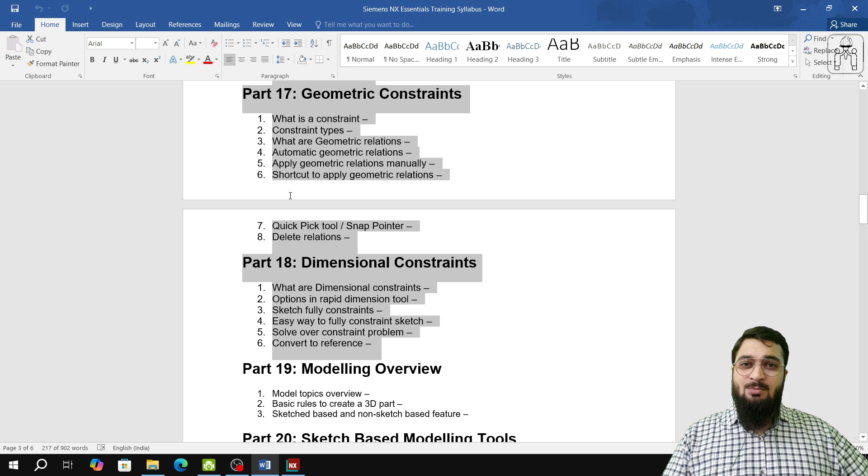In part 17 and part 18, we discussed the types of constraints and how we apply them, what are the various methods in which constraints can be used, and how dimensional constraints sometimes overthrow geometric constraints, and how geometric constraints allow us to get to the dimensional part easily but are not always fixed or superlative.

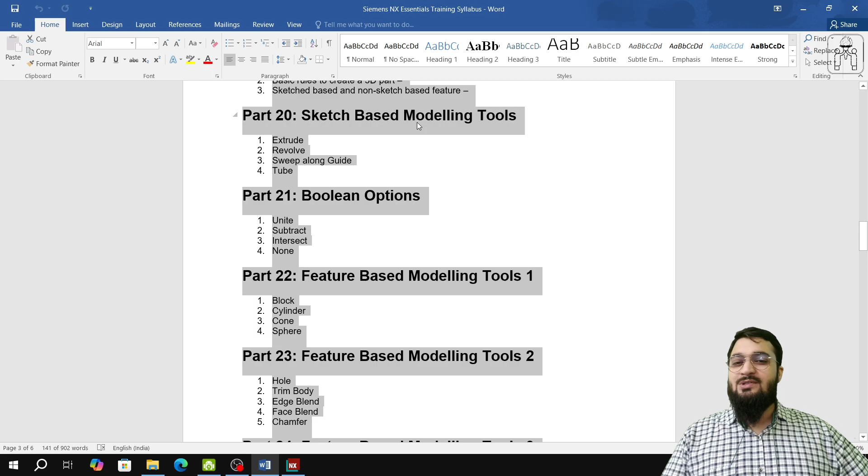Then we came to the modeling part, that is overview, and then we learned about sketch based modeling. So from part 19 till part 26, that is what we are studying today, is the part of modeling. It includes sketch based modeling tools, Boolean options, and part 22, the feature based modeling tools — the simpler ones grouped in part 1 or part 22 of 38, then somewhat difficult are part 2, then more difficult part 3, then finally patterns are part 4.

Now coming to the last part of modeling, that is part 26 of 38, the part navigator. So now we'll start with the part navigator without any delay.

The first thing available is the part navigator itself, the model history, and feature reorder. Part navigator is the option available in the left border bar, the resource bar. As we studied in the border bars section, the left border bar and resource bar are somewhat the same, along with the top, bottom, and right border bars.

In the resource bar, you have certain icons, and when you hover over them, you will see the label for each. Part Navigator is the resource we use through the modeling part, and also in the assembly part, but till the modeling part it is the core thing we use. This includes the history, model views, cameras, and model history.

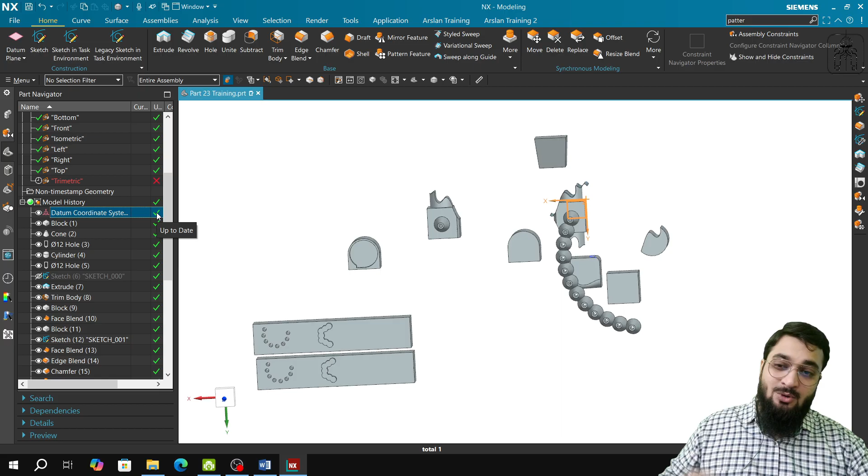Next, we come to the model history. Model history is the section in the resource bar or part navigator that allows you to see all the feature operations that have occurred in that particular file or window. So first was the block, then the cone, hole, and so on. It enlists all of them in chronological fashion, and we also learned how to reorder them and how to hide them.

You can just hide a feature from here, or unhide it from here. If you hide the parent feature, and that feature is parent to or related to another thing, it will hide all of it. So in order to unhide that, you will have to select the latest one, and when you select the latest one, that thing becomes available again.

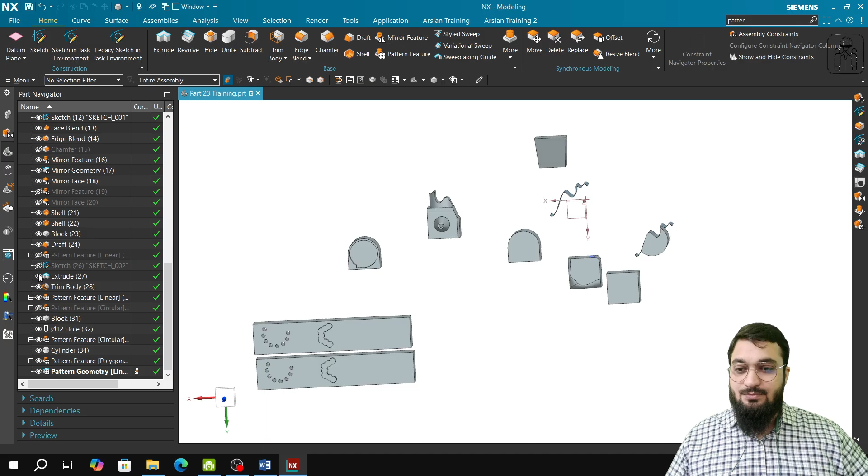When I selected this particular mirror face, it allowed me to unhide or show all of its previous parent features. This mirror feature is possible only because of this particular mirror operation. This thing is possible only because of the extrude, which is possible because of the sketch. This cylinder shape is possible because of the trim body, which is possible because of the cylinder operation, which is possible because of the block operation, and so on.

So all of this will be visible or unhidden when you click on the latest feature. But if I hide that last feature, it will also hide all of the previous related features. So that is also one thing.

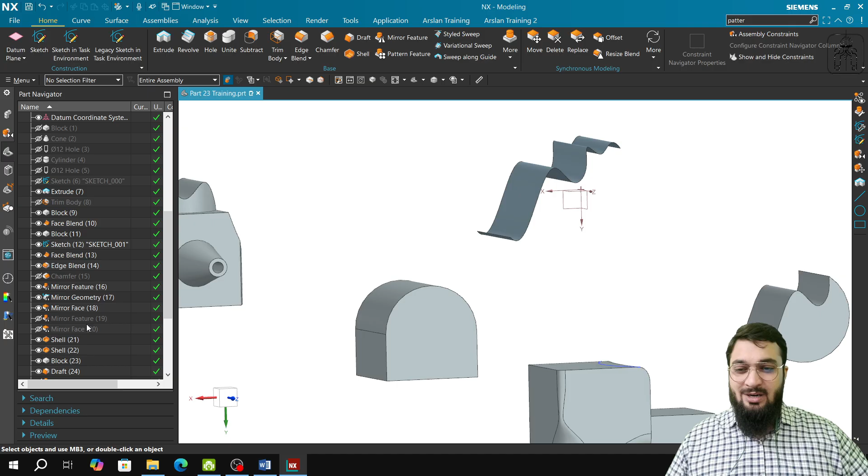If you only want to hide one thing, or hide only the parents, you can just click on hide parents and it will hide the parents. Since this other thing is not a parent, it will not be hidden. So this is also a feature that is available.

If you want to delete that, you can just click on this cross button, or you can click on that particular thing and press the delete button on your keyboard, and it will delete everything. After that, you can also right click and click on delete. So there are three methods of deleting.

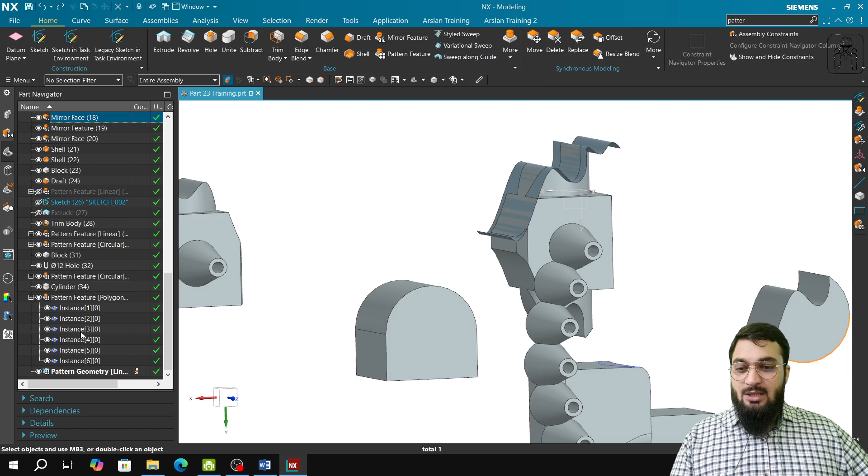Next, you can suppress a particular thing. For example, I have this pattern feature, and these are the various instances available. I will show you all of the instances, and this particular instance, for example, I do not want.

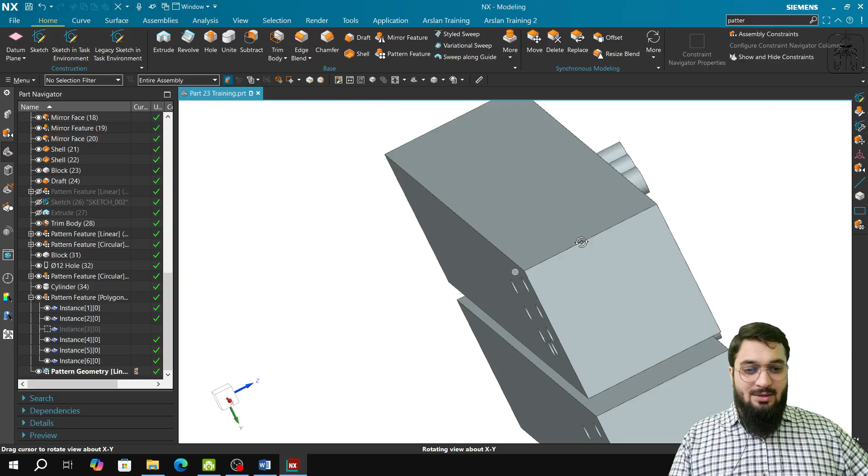So I'll just click over here and I will click on suppress, and you will see that that particular feature has been suppressed in its original, as well as the thing which was used to pattern that. Okay. However, if I unsuppress that and I just click over here, I will not be able to select that particular thing over here, because this thing was patterned using the pattern geometry. So this is something which you need to understand.

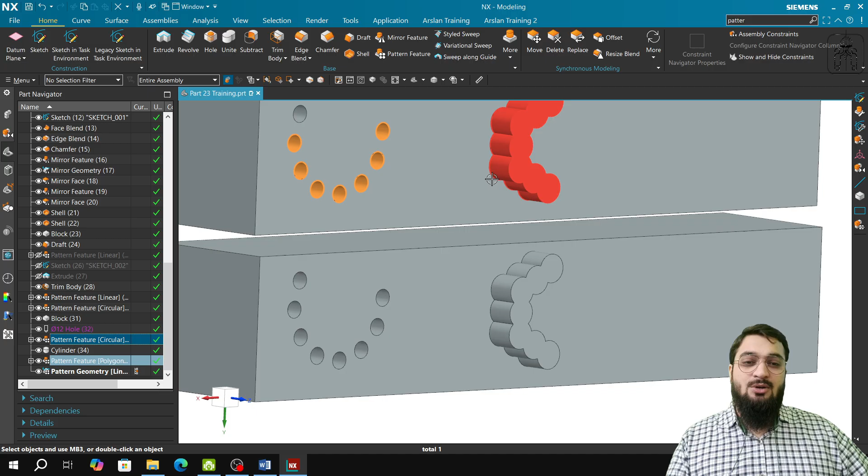Also, we can reorder features. For example, you can see that this particular pattern feature and this particular pattern feature are totally independent of each other. So I can just take this pattern feature and I can place it over here. So this is now possible. Or what you can do is that I can take this pattern feature and place it over here. And there is a dependency. Okay, there is a dependency between the hole.

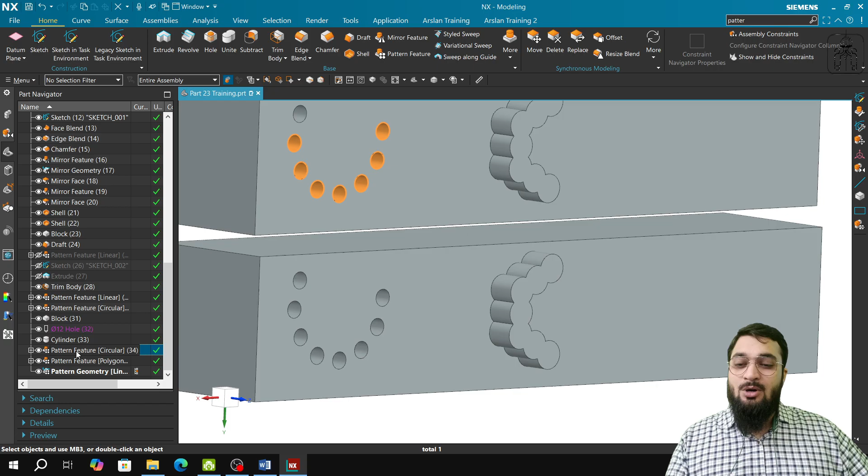Yeah, now we have reordered that, but I cannot reorder this particular feature before this hole, because that is a parent feature. So while reordering, the only thing that you need to understand is that you cannot reorder one particular thing before its parent. You understand that?

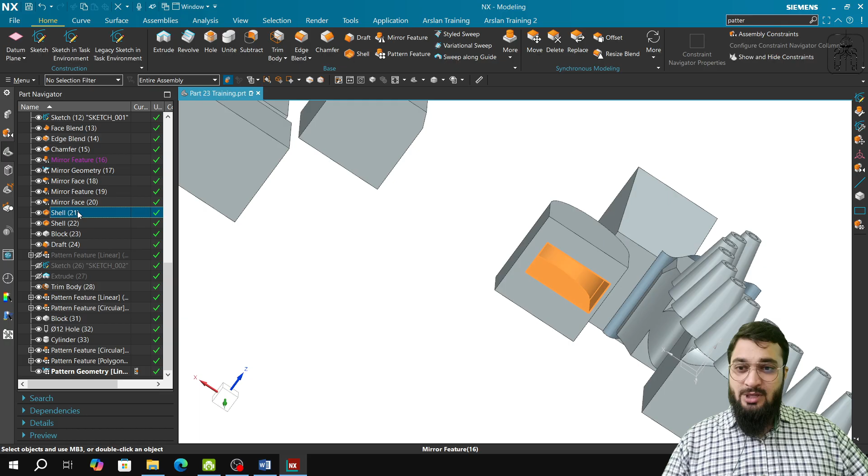So for example, this shell is done on this body, that is a mirror feature, and that mirror feature is possible because of another cube or block that is available. Okay, so I cannot reorder that particular shell before that, or I cannot reorder that particular block or pattern feature after that. So this thing is to be considered.

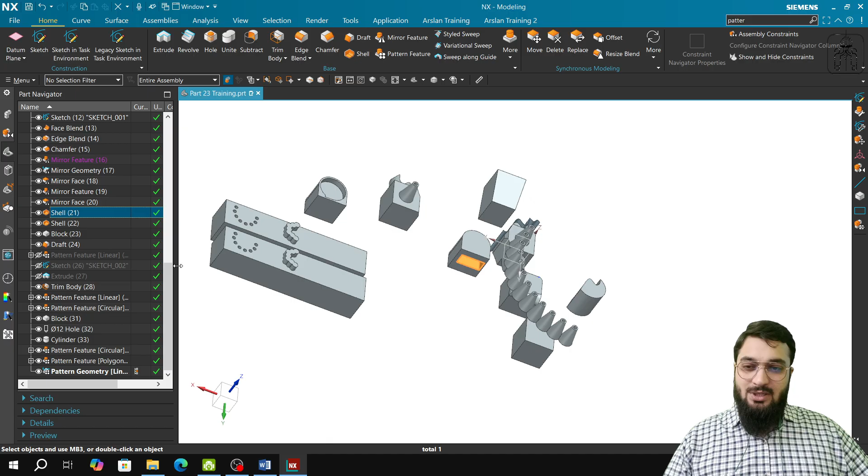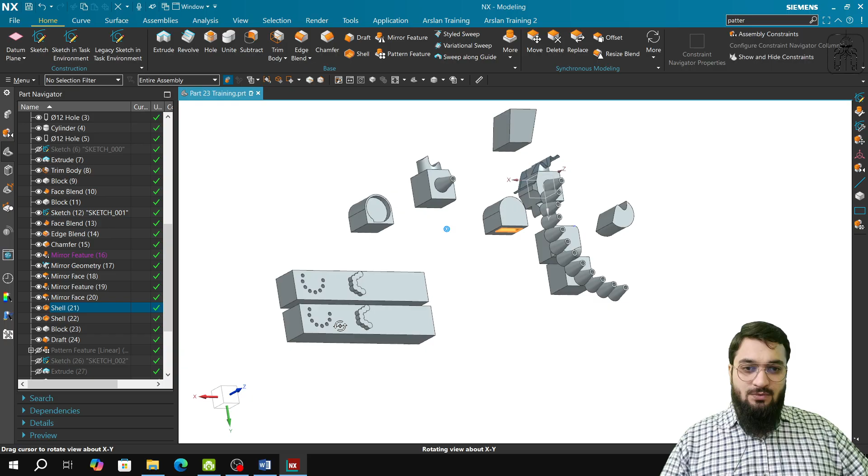After that, what we wanted to study was the part navigator, the model history that has been understood, and the feature reorder. So reorder is somewhat only this, such as you see that this block is totally independent of other ones, because it is neither a mirror feature, nor a pattern feature, nor does it have any operations that are part of any other thing. So I can take this block, I can take this draft to its first instance. For example, just after the datum coordinate system, I can take it over here.

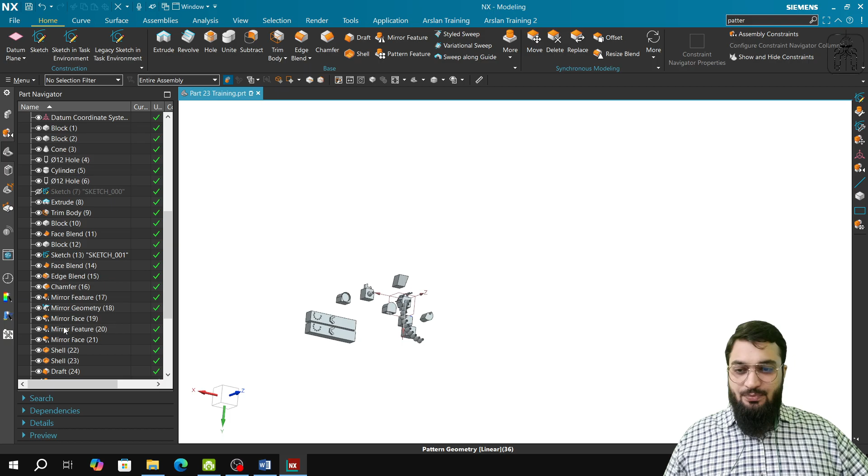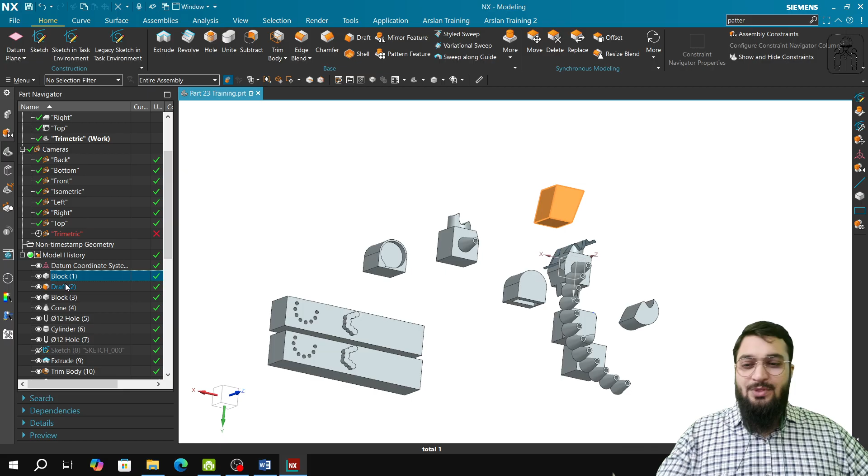Also, I can take that draft which was there, and I can take that just after the block that we took. I cannot take it before that, I have to take it after that. So this draft and this block are only possible because they are independent, and I can just shift it from the last to the first. I cannot shift the draft before the block, because that draft is only possible because the block exists, and the thing cannot be reordered in such a fashion.

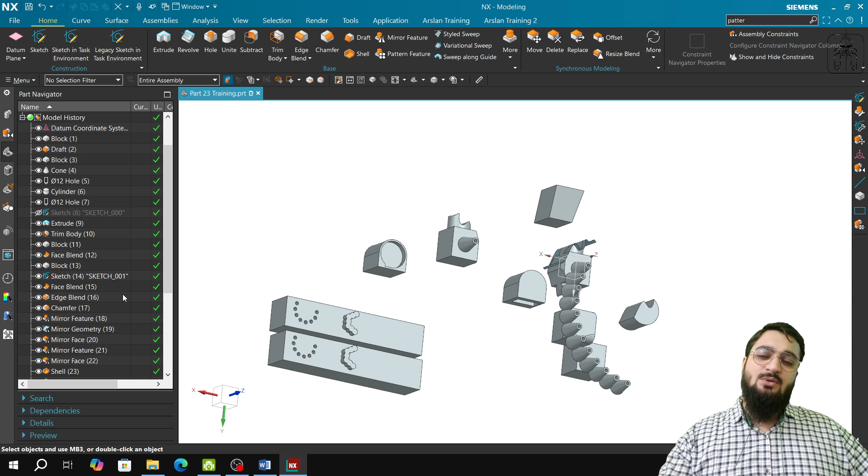So reordering only requires you to make sure that you do not reorder anything before its parent, and the parent is not reordered after its child. So this is the model history that was now studied, and with this we come to an end of our part 26, and in the next video we will be starting part 27 till part 38. We will be starting the assembly.

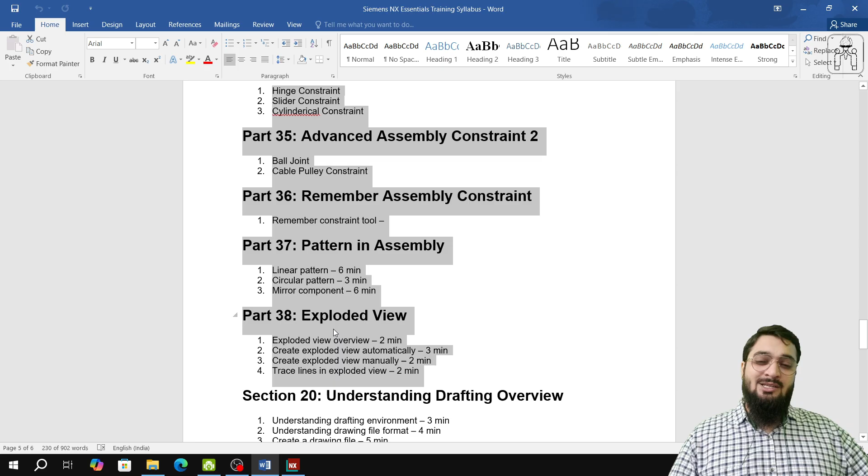We'll be starting the assembly part of Siemens NX, starting with the assembly overview, how to create an assembly, what are the constraints and what is the use of a constraint, and how do we apply some of the constraints like basic assembly constraints and advanced assembly constraints. There is an option that is very easy for the user, that is remember assembly constraints, and that will also be discussed. And then how do we use pattern in an assembly, and how do we create an exploded view. So that will be discussed in later sections.